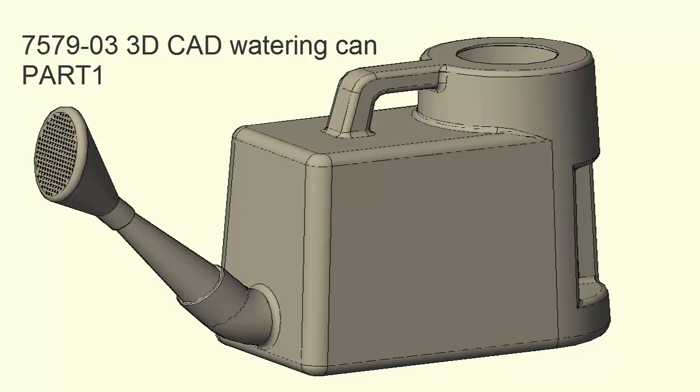Hi there. I'm going to take you through the modelling of the watering can.

I've no idea what the reference is now, but I think it's changed. I had done one in the past when it was 4353. That was 2008, I think. I'm not sure whether it's still this or not, but it'll give you a good insight into modelling in 3D.

Anyway, I have had some issues getting this thing to shell correctly. 'No loop through vertices' keeps cropping up all the time. Not 100% certain what it means. It seems to be something to do with the fillet of this spout.

I've traced it all the way back, shelling as I went, and when I got to this bit there seemed to be a problem. We've also got to bear in mind that these heights they've given us are vertical heights when things are on an angle.

Other things you need to bear in mind: this is a 3D taper on the path extrusion at this point.

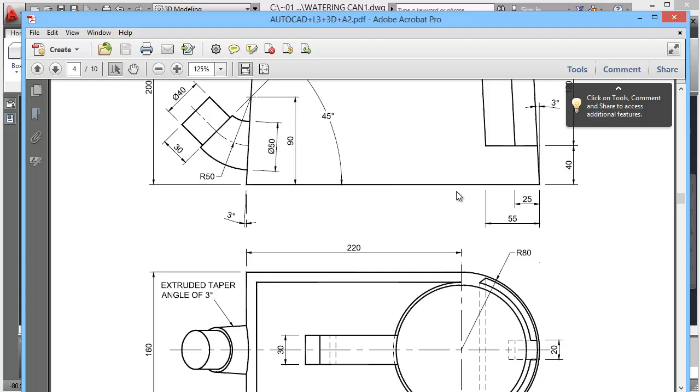Also, we have to create something to give us this shape, so we create a pattern, chop that out of this tower thing, then that'll give us the handle. We cannot sort of build them individually because that's got a nice little curve on it.

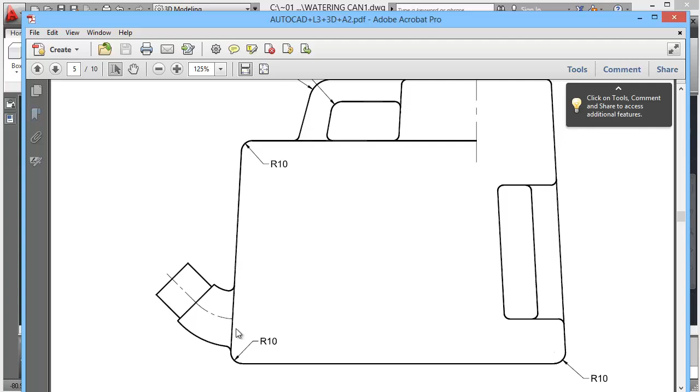What else do you need to know? Not much, we'll just build it and see how it goes. But this has caused a problem, so what I found that works is if you fillet this thing out at 4.9 instead of 5, then it seems to shell out.

Okay, so I'm not sure whether you'll get it to work or not. Might be a setting on the computer. Somebody mentioned something about the area in which it's working. I've absolutely no idea. Anyway, I just draw with this, don't get into the guts of it.

But we'll start off by creating an extrusion. Oh, the other thing I was going to mention is this tapering.

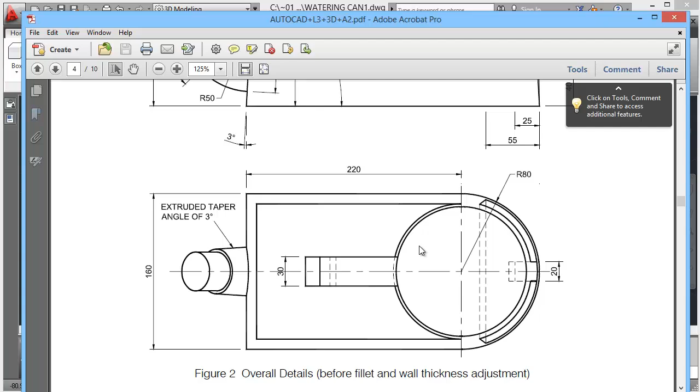This tower meets with this back edge, but the rest of the faces have a 3 degree taper on them. So there's a 3 degree taper on this and this extrusion, but not on this back edge. Otherwise it'll come in at an angle and you'll get a nasty junction at that point.

So what we'll do is extrude this box with a 3 degree taper and then just pull that last bit back out. We'll draw a line vertically so it meets it, and then we can put the tower in and join the two together. Alright, let's go.

I'm using AutoCAD 2013. I've got the 3D modeling workspace set up. I'll be flicking between this tab and this tab, probably using keyboard shortcuts, fishing for the right command instead of using the keyboard shortcut if I'm sitting on my hands or something. Anyway, we'll get on with it.

So the first part is to draw a rectangle, and it's 160 in the Y direction and 220 in the X direction. So it's 220, 160. Double click the wheel just to zoom to extents.

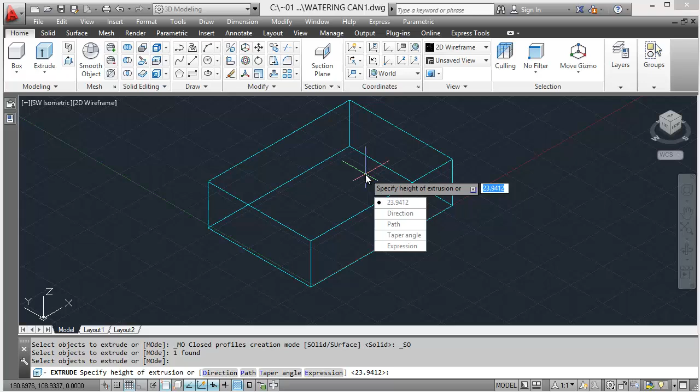Then we can use the extrude command, select the rectangle, hit enter, use our down arrow or right click and put in our taper angle of 3, and then the height of the extrusion is 200. Okay, so that's the first bit created.

Now we need to stretch this out just to line it back up with a vertical line. So, line tool, turn off dynamic UCS to start off with. That's F6, I think. Yeah, so just turn off DUCS, and then we can draw a vertical line on the positive Z direction. Doesn't matter how big.

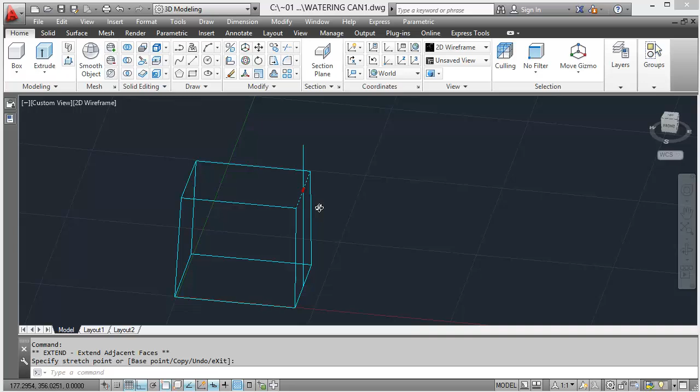So then we can come in to this bit. Now, if I control select that vertices, it gives me a chance to just pull that grip out. If I click on orthogonal or ortho mode, then where that meets that gives us a nice flat top. Just go to the front, we'll see that's a nice flat top and that's a flat back. So there we go.

At this point we can draw a circle, that point, and that's 80. And this is also extruded.

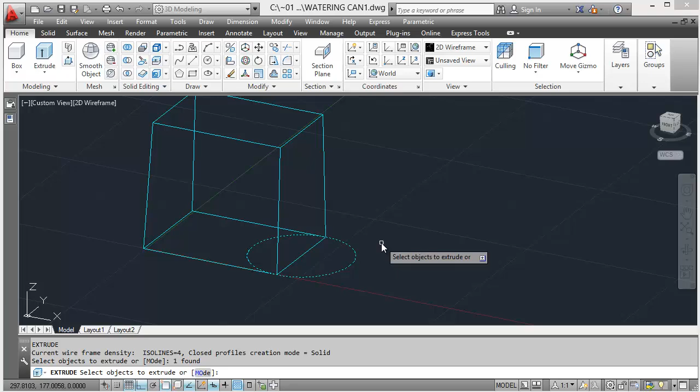EXT for extrude, hit enter, select the object, down arrow - oops no, hit enter, now hit the down arrow, taper angle, hit enter, height 255, and then hit enter. Okay, so we've got our tower and our base.

Let's put the handle on next. The handle again is a weird shape, so take care. It's an 80-degree angle on this, 75-degree on that. It's 55mm high. It's 25mm wide at the front bit, and it's 20mm at the height.

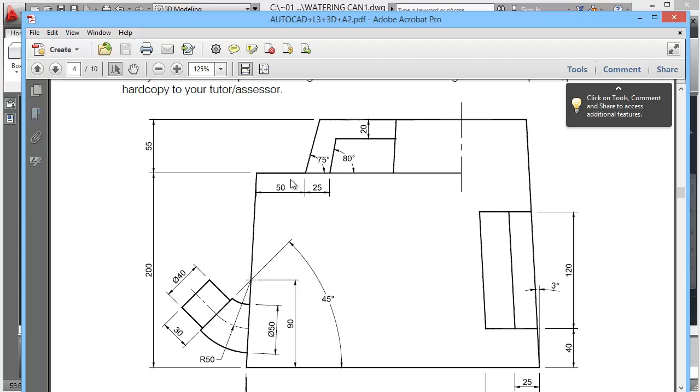You couldn't really path extrude it. You're going to have to basically create this shape, which is easy enough to create, and then just offset that the distance of 30mm, and then we'll move it into position.

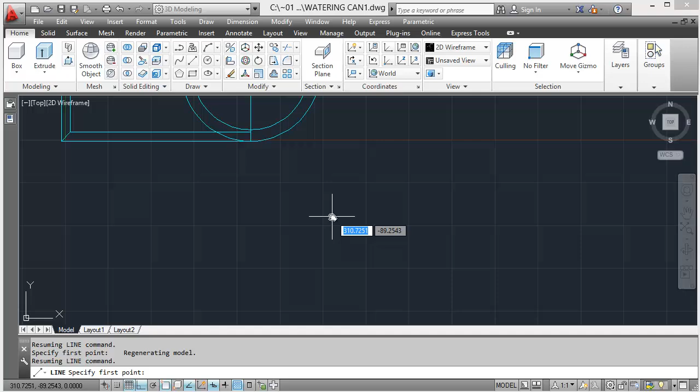So if I just draw a line tool, if I go to my top, just so we can draw this in.

Doesn't matter how big that is. O for offset, hit enter, 55, hit enter, offset that. Then line tool from that point.

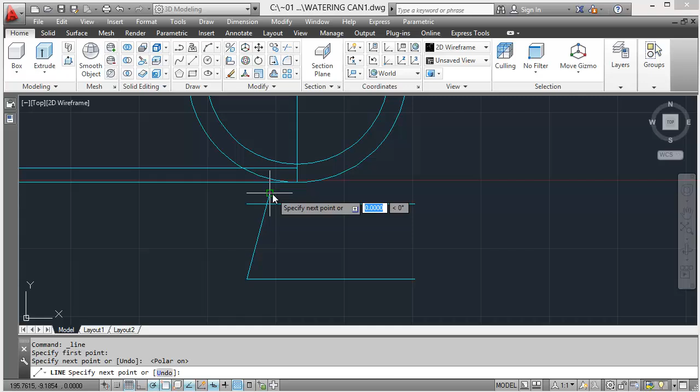Now we're on ortho, so we need to go back to polar. If I right click and set our angle to 5, then we can put the first angle in at 75. Hit enter to call up the line tool again. Track from that point 25. Hit enter, 80 degrees. There we go.

Then O for offset, hit enter, 20mm, and offset that. That's the basic shape of our handle.

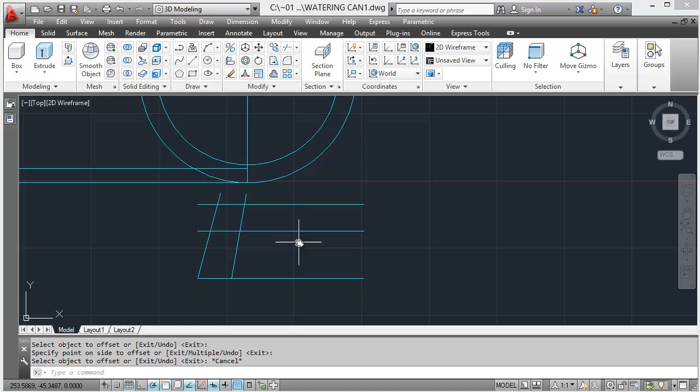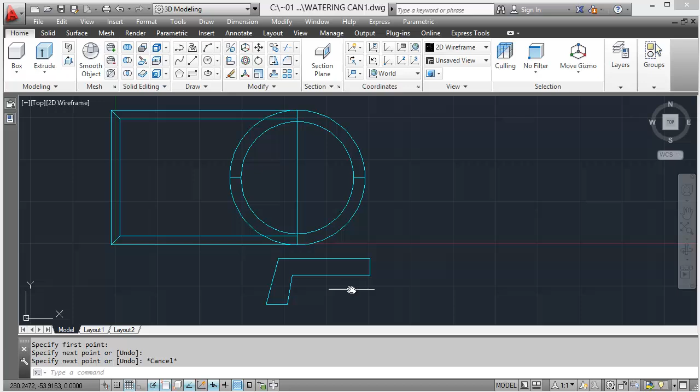TR for trim, enter, enter. So hit enter twice, and that gives us the opportunity to just do some random pruning. And then we just want to close this off, because this will get lost when we intersect or union the Boolean operation. I think that should be enough.

REG for region, hit enter. The region creates a flat sort of 2D 3D object, if you understand what I mean. It's not a polyline, but it's a similar thing. And then hit enter, which allows us to extrude it anyway, so we'll do that.

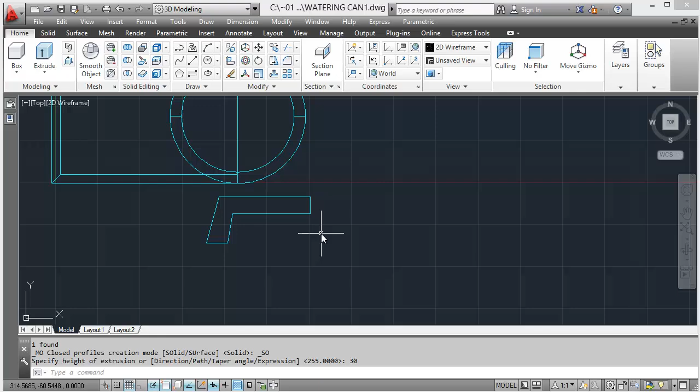Hit extrude, specify the height for the extrusion. It's 30. We can't see any change on that at the moment. Let's just go back to that. We got our height.

So we just have to rotate this through 90 degrees and pop it onto this point here. If I scoot around to this side, just line that up, and then choose our UCS face and select this face, and then accept that.

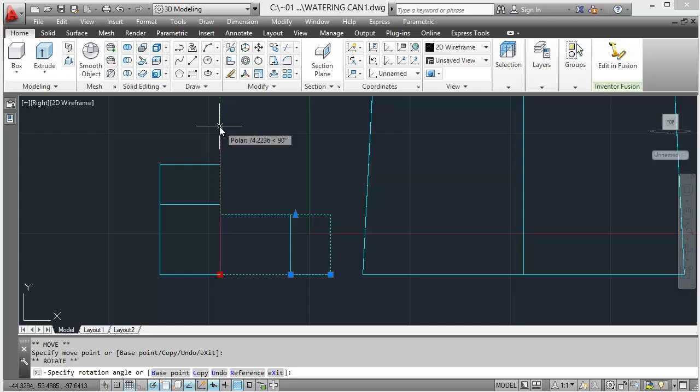That gives us XY going this way, so I can then select this object. If I click on that grip and hit the space bar once and then twice, it gives me the rotation option, so I can rotate that through 90 degrees.

Just bang that back and select it. Back to world, and let's go back to that one.

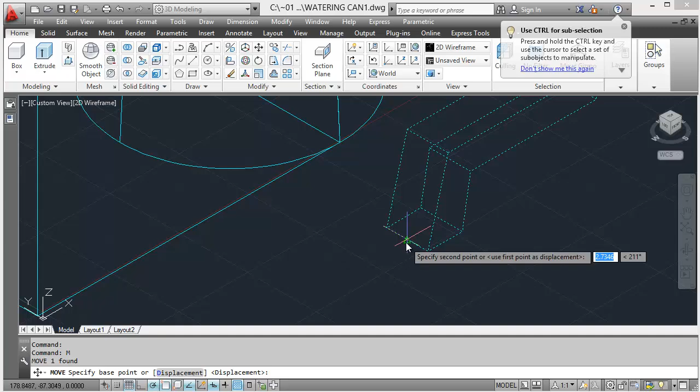Pick this up, M, enter, so click on that midpoint there, pan to that midpoint then, and track along 55, and that should position it 55mm on that face, like so.

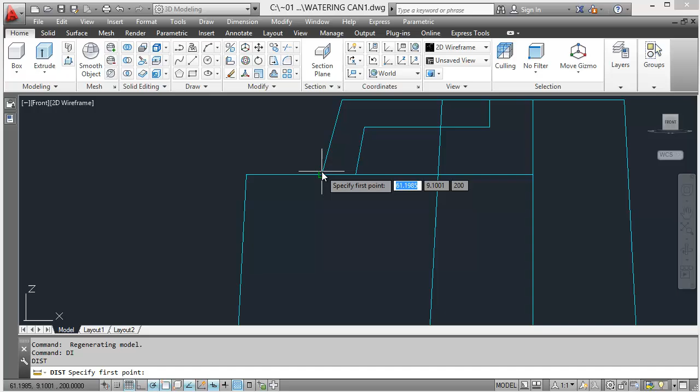DI, enter, click, click, 55mm. Perfect. So I can now

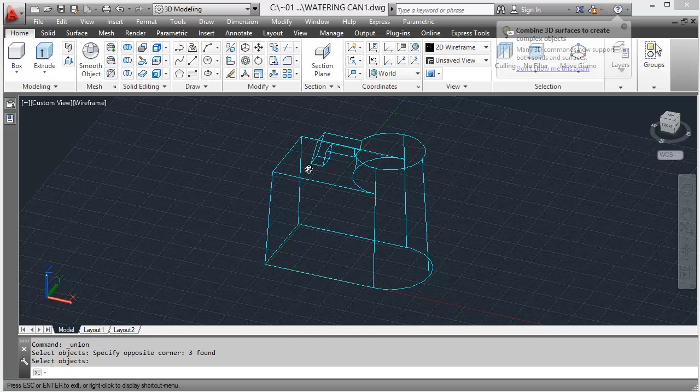intersect these three things - this is a union, not intersect, sorry - it may turn into one thing. Select them all, hit enter, and that's now made that tower shape. Okay, so that's that.

This is a nice, neat, clean edge. That's got rid of the bit inside. And these things are tapered by 3 degrees. So looking okay so far.

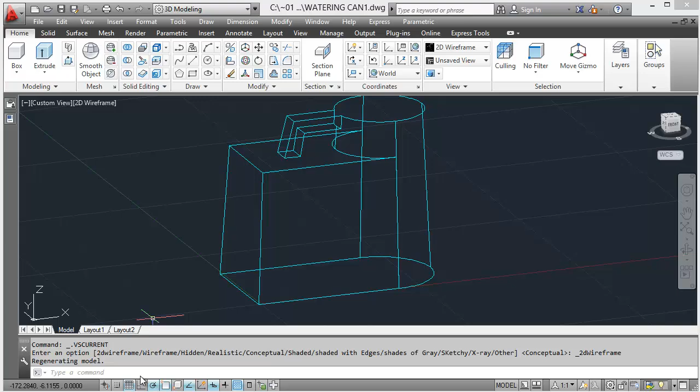The next bit, as I was pointed out earlier, we've got this bit which is a 90-degree vertical line up, and then we'll draw it in so it meets this face, and we'll have to draw a line on this face so it gives us the intersection point so we can start generating this spout thing.

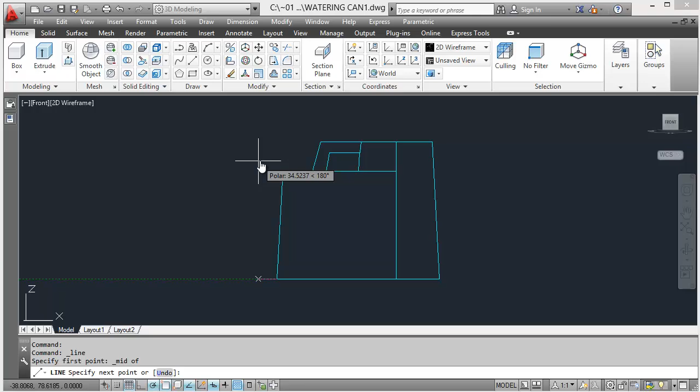So the first thing I'll do is go back to my front view and choose the line tool. If I go to shift and right click and midpoint, then I might get that midpoint straight off. Don't know why that's not allowing me to do that. Let's try again. All I want is a positive

Z-axis. X, Y, Z. Click there. For some reason it wouldn't do that. So anyway, I want a line vertically up there. Let's just select that and delete it.

Go vertically up and enter 90, and then hit enter. Then make sure we're on 0 degrees.

Then we'll choose a line tool again, shift right click, midpoint. We'll pick that point and then snap to the end point. So this intersection between this line, which is from 90 degrees vertically in, and this line which is on the face, that's going to give us the line in which we create our circle.

The first circle is to give us the arc, this thing here, so that's a 50 radius from that point, and the other circle is on the face of this. So we can use a couple of different UCS settings to generate that.

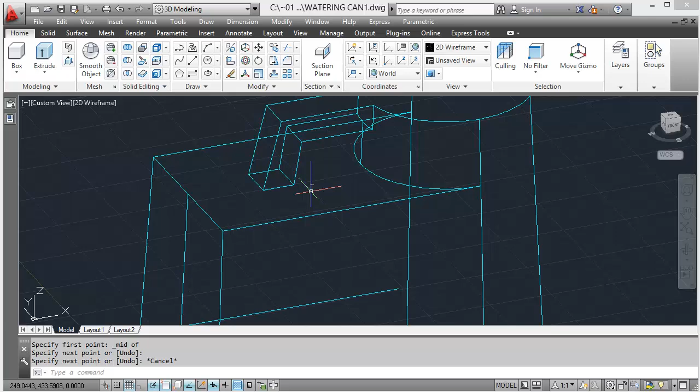First of all, I'm going to use this flat face to generate my circle. So if I right click, face, select my face, which is that face, accept it. Doesn't seem to like that.

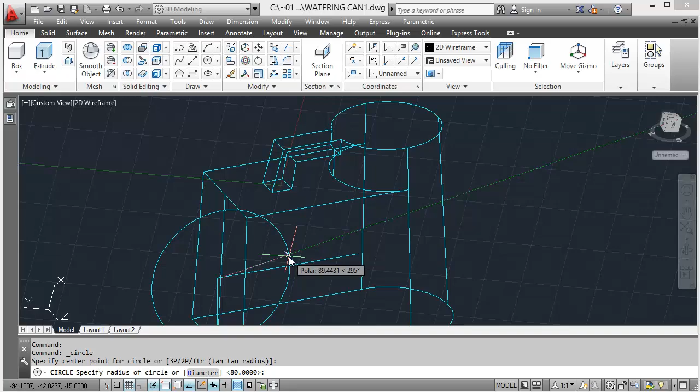Let's see if it draws a circle. Nonetheless, doesn't seem to be a problem with the circle, and that's 50 radius. Let's just check that that's flat on, which it is. Yeah, so regardless of our UCS being a bit weird, it's drawn that face just fine.

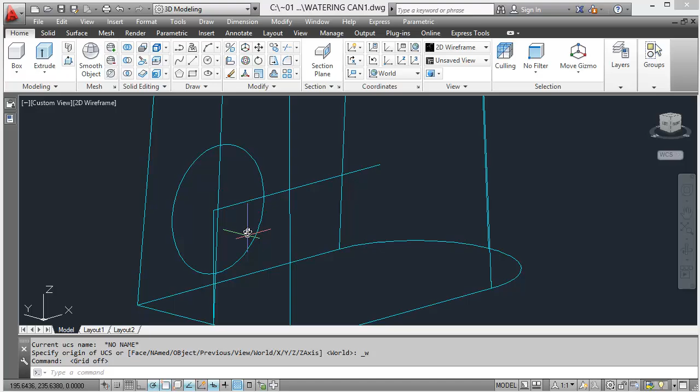In fact, I think I'll get rid of this grid because it's confusing me ever so slightly. The next thing we need to do is to draw our 45 degree line in from that point.

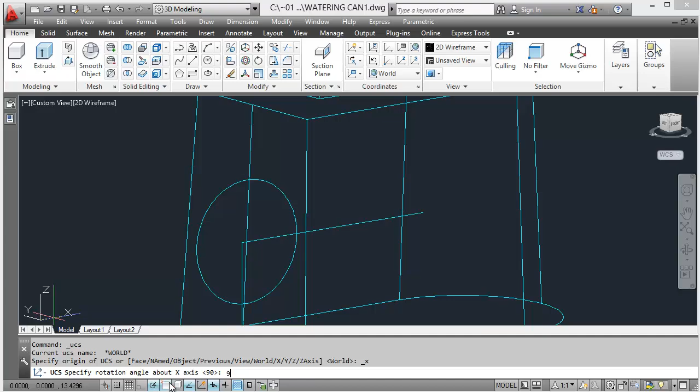We've got to rotate this around the x-axis through 90 degrees. So rotate axis X, 90, enter. Then this is our top view looking down. So understanding these UCSs is a pain in the ass, to be perfectly honest, in AutoCAD.

I'm sure you might find it much easier than me, but SketchUp, which is my favourite bit of 3D modelling software, it's a piece of cake to do all this stuff.

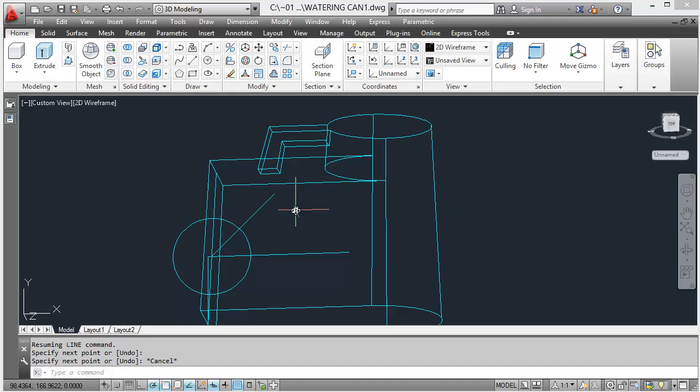So 45 degrees, I'll just draw that line in like so, and then I'll move that from there to there because the angles are slightly weird. So this is our path from that point to that point.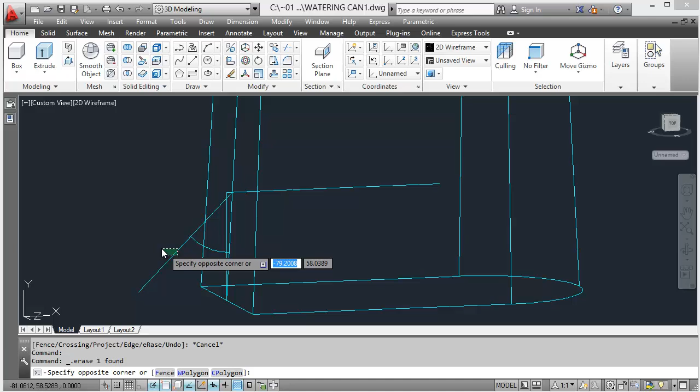TR for trim, enter, enter, see if this will trim it out straight off. It did, thankfully. We don't need this anymore. We don't need that. We don't need that. Just need this.

Now this is where we can use dynamic UCS. C for circle, hit enter, click, and 25 for our radius.

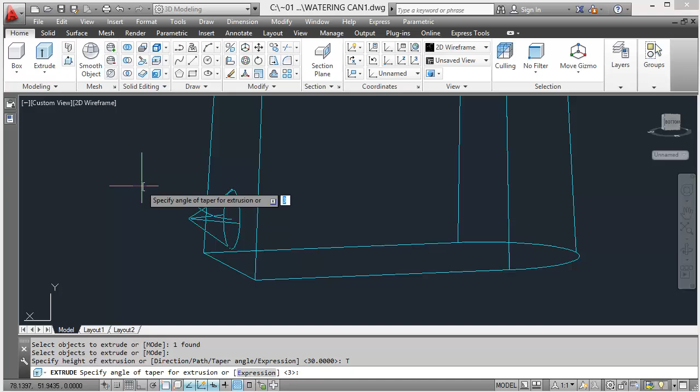We now have to taper, extrude along this path, with a 3 degree taper. So extrude object, enter, down arrow, taper angle, 3, enter, down arrow, path, select, and there you go. So that's created that thing, that little stubby pipe bit there.

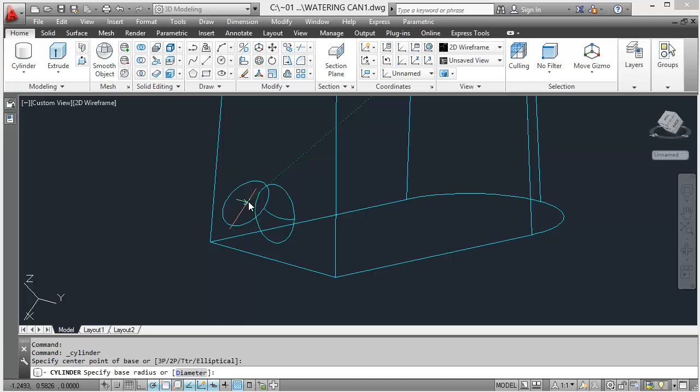So we'll just add the extra bit on, and again dynamic UCS is perfect for this. Why not use a cylinder? So we can click on that, choose the center point. It's a 20mm thing and 30mm long.

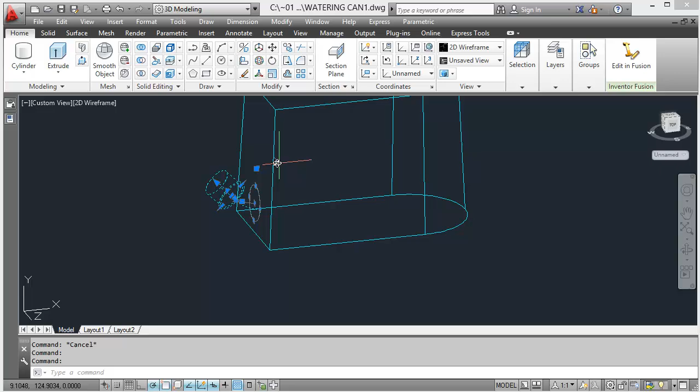So 20 for our radius and 30 on the end. So select that, select that, select that, choose that. Oh, you've got to sort of select them again. I keep making that mistake. Now we've got this thing starting to look a bit like a watering can.

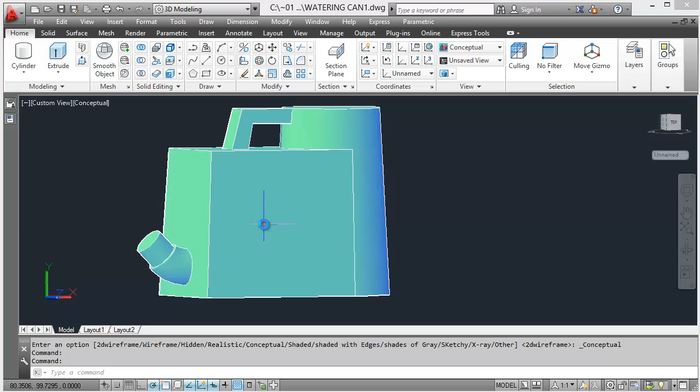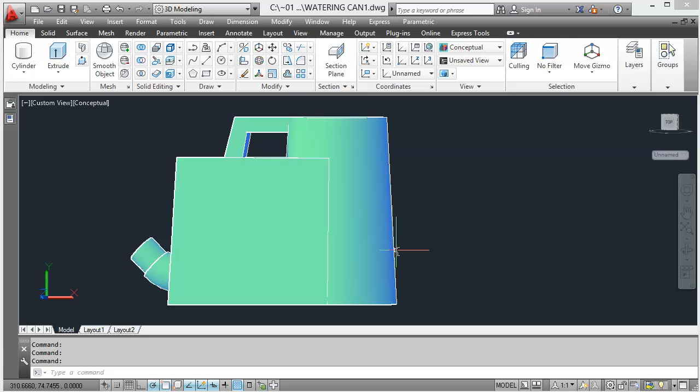Anyway, we'll put the back bit in now. The back bit, we have to create a sort of a pattern that we can cut out of this, because otherwise you'll never be able to chop that bit out and then add this handle bit. So we make a shape that's going to create the choppy out bit, this bit. So the shape is going to be a 55 by 120 sort of skewed square.

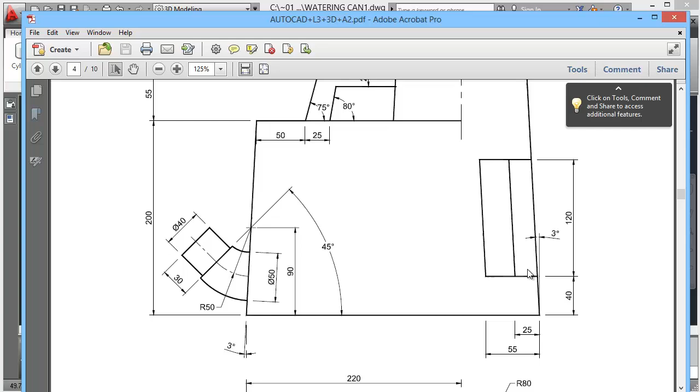So we'll draw the square 55 by 120, then we'll skew it 3 degrees, and we'll also do the same thing with a 25 by 120 square. And then we'll extrude this thing 20mm wide, and we'll chop it out of this box that we're going to create, and then we'll chop that box with the recess out of this thing, and it'll give us that shape. All sounds far more complicated than it actually is.

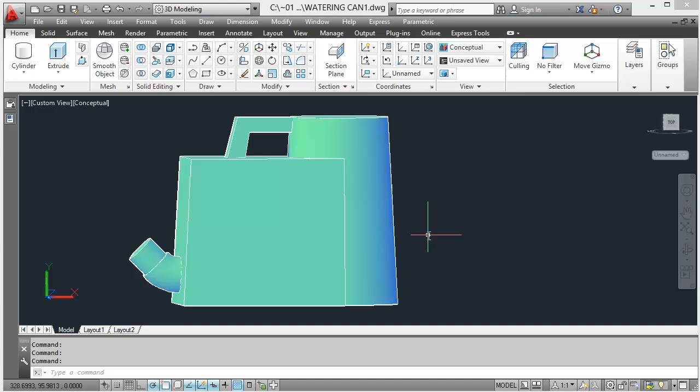So let's go to, whoops, dear God, where are we going? Bear with me. Magical tour of the watering can.

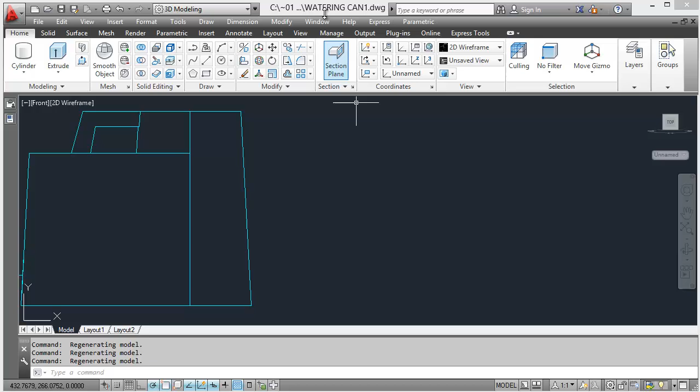XY, that's what I want, so rectangle, and we'll choose, it's 55 by 120, and we'll draw one more, hit enter, call up that thing. This is 25 by 120. Now we need to draw a line at 3 degrees to give us our skew. So if we draw a line up there and hit the tab key, and that's going to be 93, and then hit the tab key again and just click.

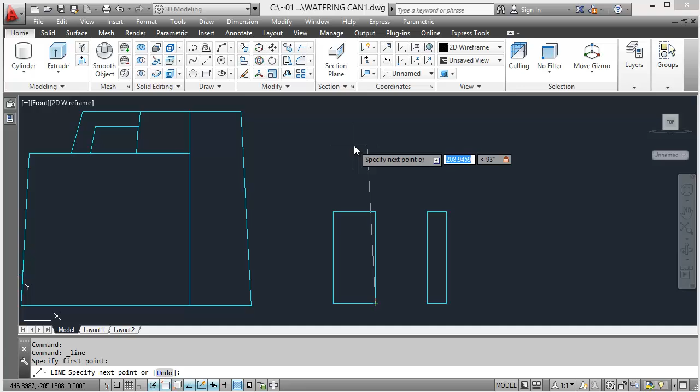Did the wrong thing there, didn't I? Choose our base point, hit the tab key, 93, hit the tab key, and just click somewhere. That gives us our 3 degree line, and we can copy that there. If you hit that grip and then tap the space bar once, then you'll be able to move that along. If you tap C and then tap the space bar as well, that copies that line. It's a very useful little tip.

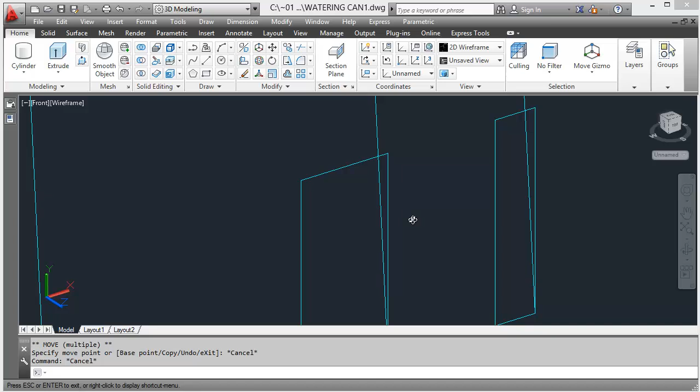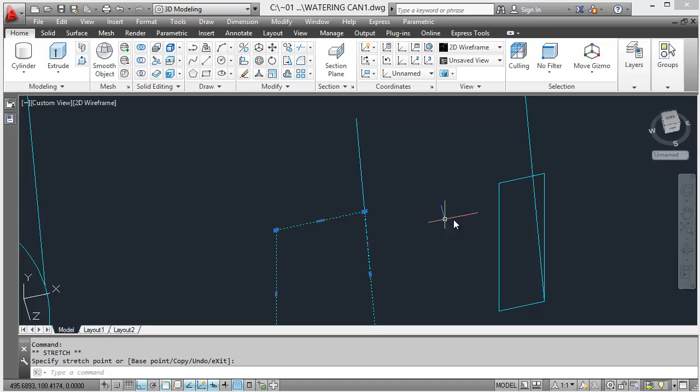Now we've got to select that and shift key down, hot grip those two things, make sure you've got ortho turned on just in case, and it's hitting that intersect point, not the perpendicular. Perpendicular is down there, intersects up there. So make sure that it hits the intersect point. Similarly with this, 1 click, 2 clicks, 3 clicks. Okay, so those are the 2 things that we need.

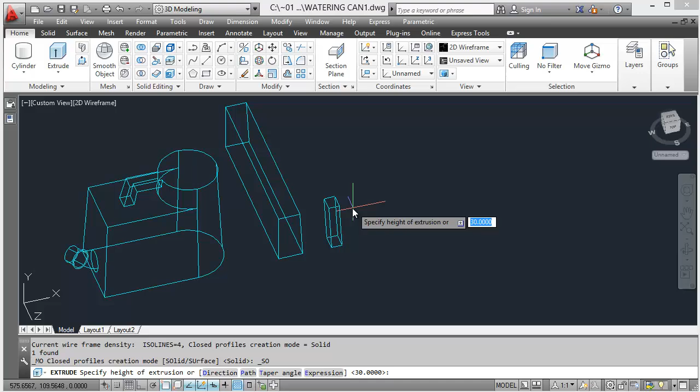They're nicely shaped. This thing, let's use the press pull for this. Let's use as many tools as we can. This thing will extrude out 20, I think it was. Let's just check. 20, correct. And then we'll move that, enter, into, whoops, this bit. Let's find a midpoint there. Okay, so that's moved into that.

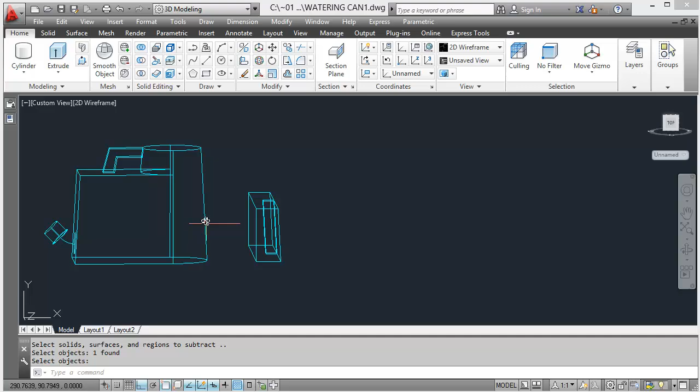We need to subtract this from this. So it's a Boolean subtract. Select, enter, then select the thing you're going to take out, enter. So that's perfect. Now we need to position this on this back edge, and again it's a similar task that we did previously. Up 40, and the intersection between a vertical line and an angled line. Well, that's how I interpret it anyway.

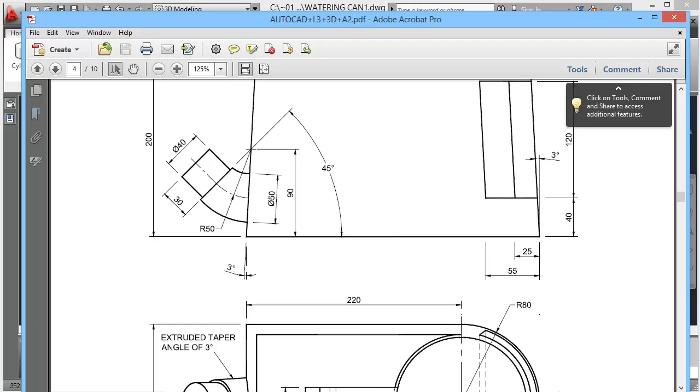You might decide that that's simply 40 degrees on the angle. I think it's 40 degrees vertically, line in, which gives you a slightly higher line if you were measuring it just on this. Okay. So back into this line tool, click that point there, and 40, enter, and then we go in there.

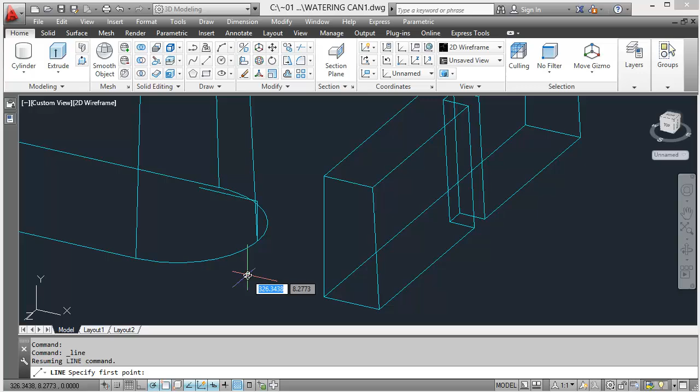Line tool again, let's turn ortho off. Now if we shift and right click and pick our quadrant point, then we'll get that bit there. And shift and right click and choose quadrant again. And we know we get the right spot then. It kind of overrides everything else.

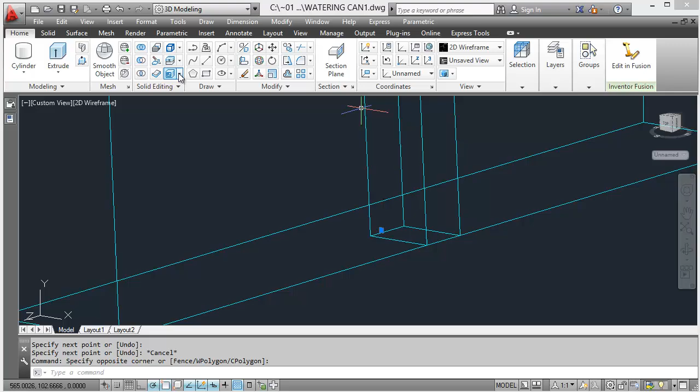We can then move this. I don't know whether I can do mid between 2 points here. No, it's not giving us the option. So the easiest thing to do is just to pop a little line in there, or track from there and choose 10. So select this, move, pick it up from that point there. We don't need to bring the stick with us, we just need to have that option.

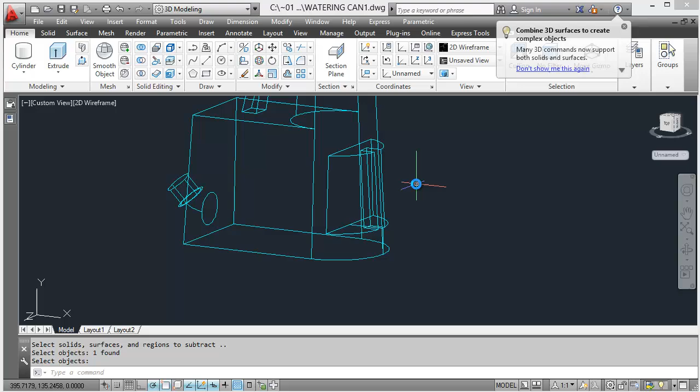So we can delete that, because that was the push-pull, and now we can delete this from this. So that, select the big thing, enter, select the other thing, enter, and that gives us that shape. We let the software work out all the geometry. You'd never have got that little curve in otherwise. Well, you might have been able to, but it would have been bloody tricky.

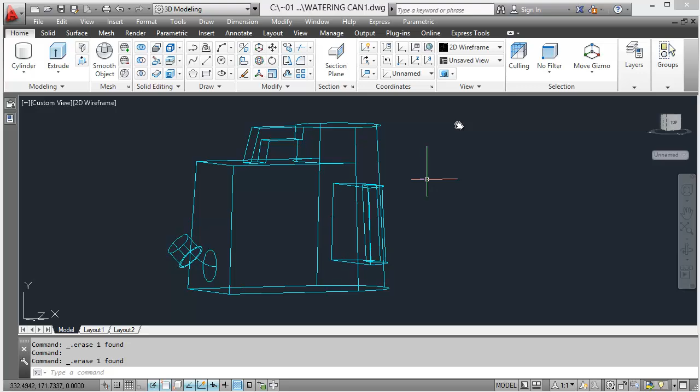So that we can dispense with, and so we can dispense with that. Alright, so let's just take a little look at our endeavours so far. Oh, and we got a line there we can say goodbye to as well.